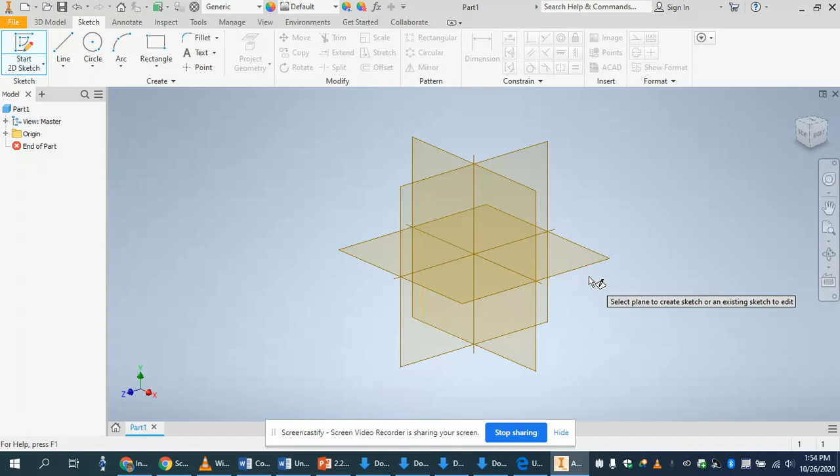You need to switch over to sketch mode if it doesn't come up with the 3 sketch planes to begin with. I think Inventor is still trying to open. And I'm going to do my new 2D sketch. Okay. So now what I want to do is draw a puzzle piece that looks like an L, but it has a little piece sticking out. So I'm going to start on this plane. And it doesn't really matter which plane you start on.

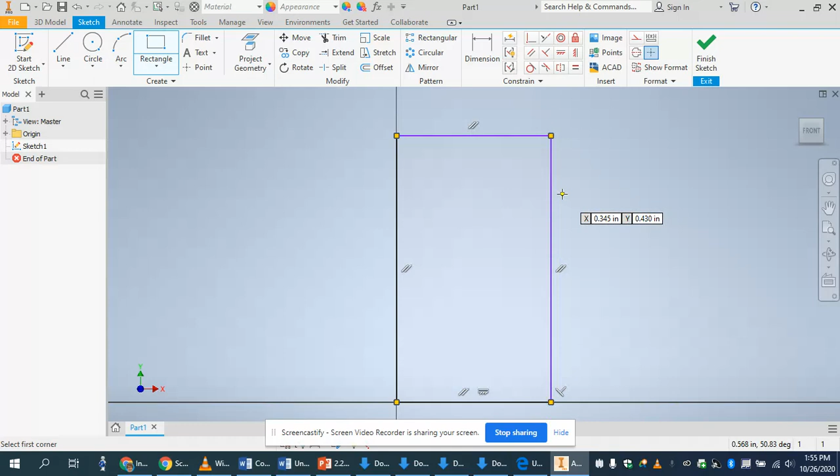And I'm going to use the rectangle tool. So let me draw a rectangle. And my puzzle piece is going to be 3 cubes high. And once I set my rectangle down, I'm going to dimension it. This is going to be 1 cube wide. So I'm going to make it 0.75 inches because each wooden cube is 3/4 of an inch. And again, it's 3 cubes high.

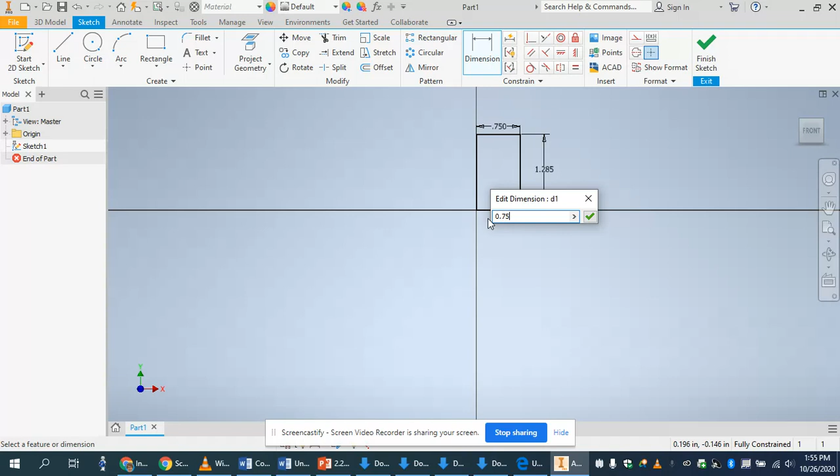So again, I'm still selected in the dimensioning tool. So 3 cubes would be 2.25 inches, right? If you're not good at math in your head, you can also type 0.75 times, using the little asterisk, 3 and click OK.

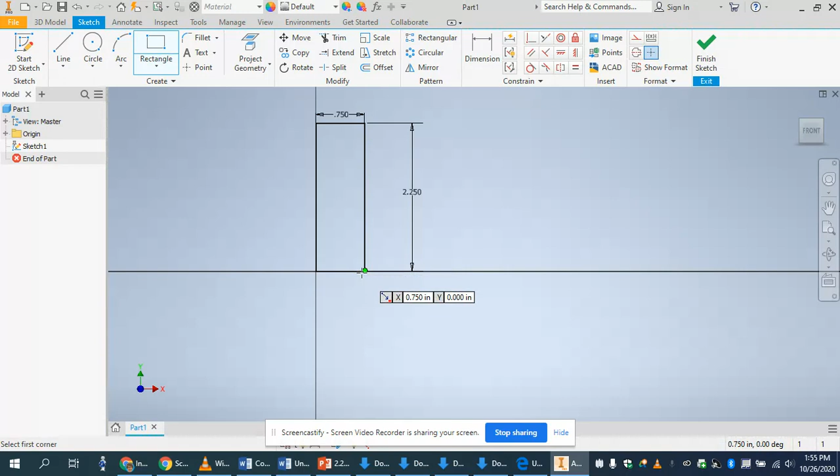Okay. And then I'm going to also create a little L-shaped piece. So I'm going to click on this rectangle again, and I'm going to add over here to this corner. Notice how I'm looking for this green dot. I need the green dot to know that I'm connecting my 2 rectangles. Okay. Then I'm going to click dimension again and make sure this is 0.75. And this will also be 0.75 as well here.

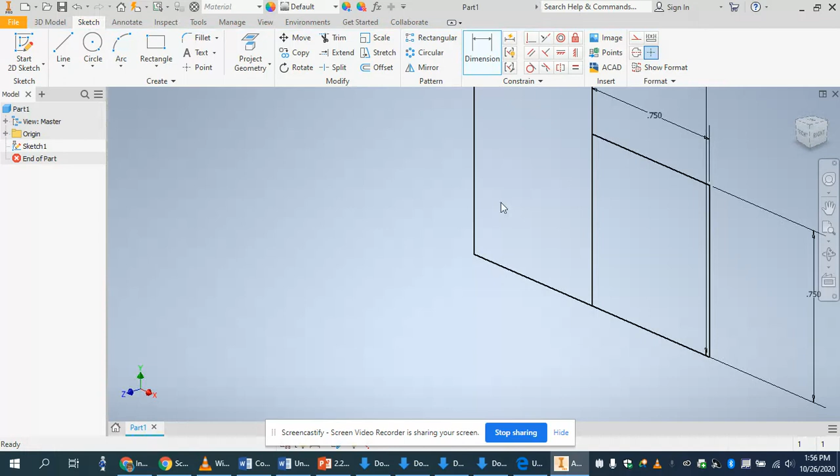And now I'm ready to extrude. So I'm going to click Finish Sketch. Zoom. I'm zooming with my scroll wheel on my mouse. Of course, you can use these tools over here to help you zoom.

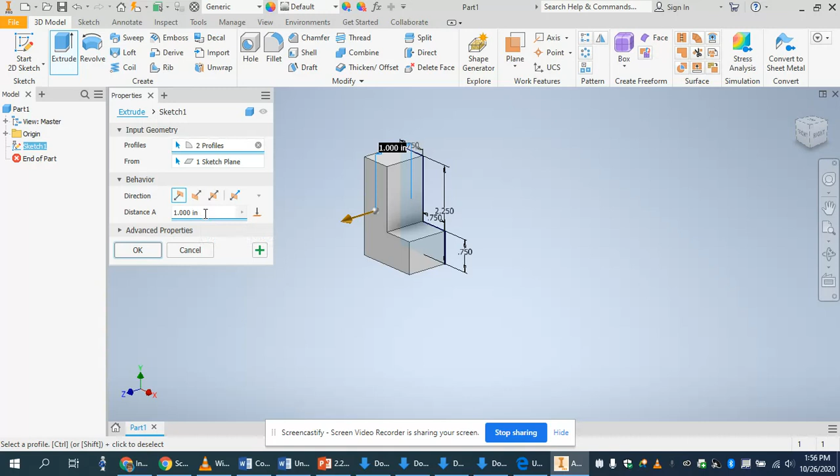I'm going to switch over to the 3D Model tab, click Extrude, and now I'm going to click both my rectangles, my rectangle and my square, and it's trying to extrude 1 inch, but I want it to extrude 0.75 inches. So I'm going to change this to 0.75, and then I'm going to click OK. And now it's created the first part of my puzzle piece.

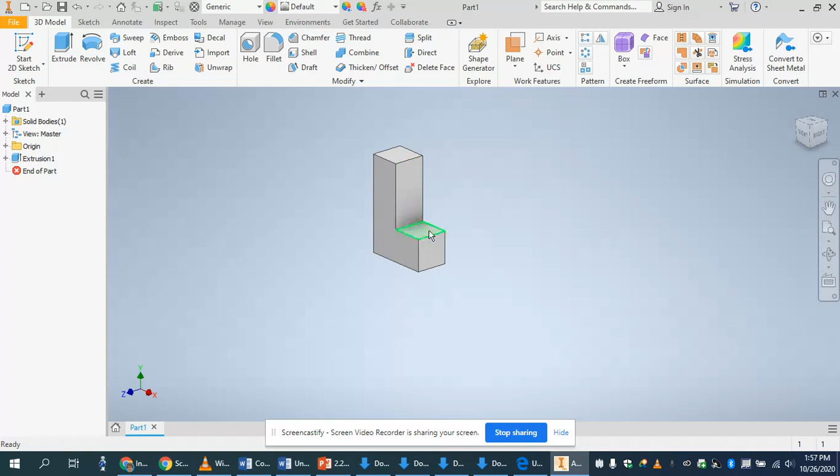Now, assuming I have something else sticking out on the other side of this piece, I'm going to keep going. So remember, you need to have 2 cubes in the height, width, and depth, so this wouldn't meet our constraints. So I'm going to right click on this face and do a new sketch to add my 3rd cube sticking out. I'm going to go back to my rectangle tool. I'm going to get my green dot again here and here. And you can see that my dimensions are 0.75 by 0.75. So no need to further dimension that. It is locked in place once I lock that down.

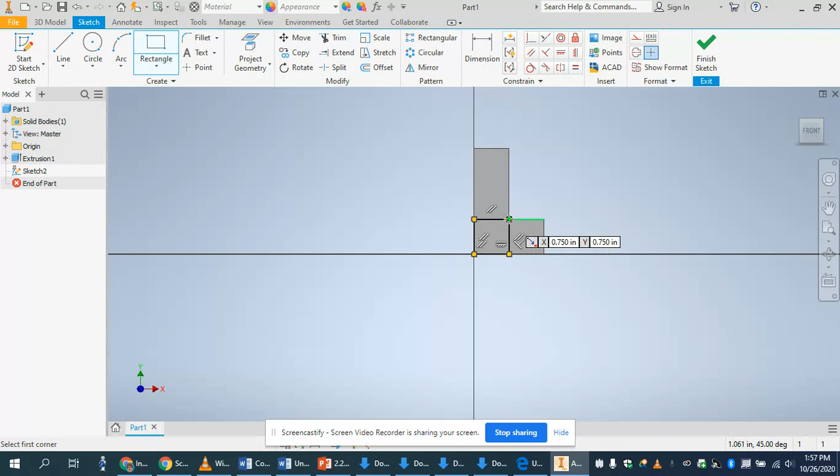Usually, if you're not connecting to other points on the part, you would have to make sure the dimension is set because that constrains the part, and the part could change size if you don't specifically put a dimension on there. But because I locked this one corner to the outside corner, and 1 corner to the inside corner, it cannot change dimension.

So I'm going to finish that sketch. I'm going to extrude. And now Inventor remembers, oh, I extruded 0.75 last time. It probably wants me to extrude 0.75 this time. I'm going to click OK.

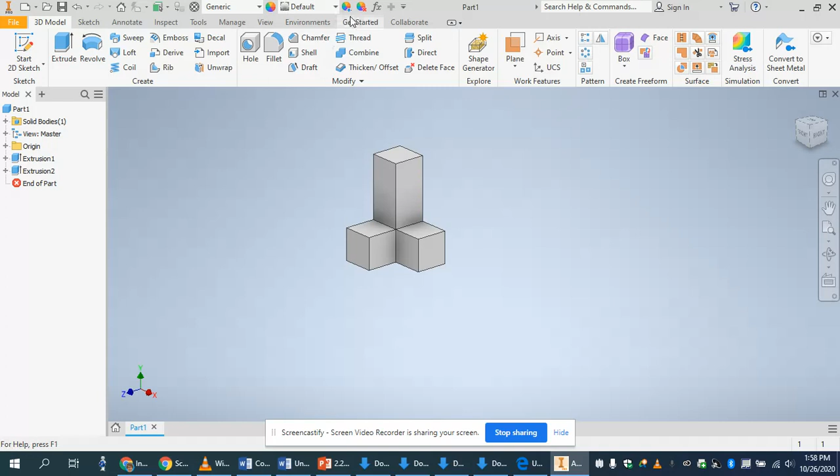And now I'm going to change the color of my part. To do that, I'm going to click on this color wheel. I'm going to go select the part name, and then I want to tell it what color I want it. So let's say it's yellow. And then I'm going to click the green check mark, and now I'm ready to save my part.

So I'm going to save the part, and then I'm going to go back and create a new file for the next part. I would probably name this file yellow part. Okay.